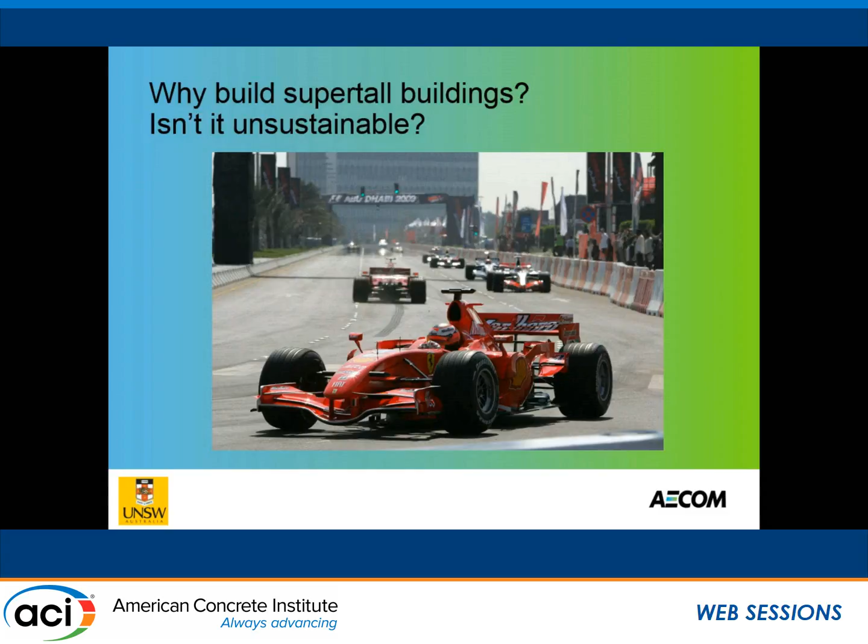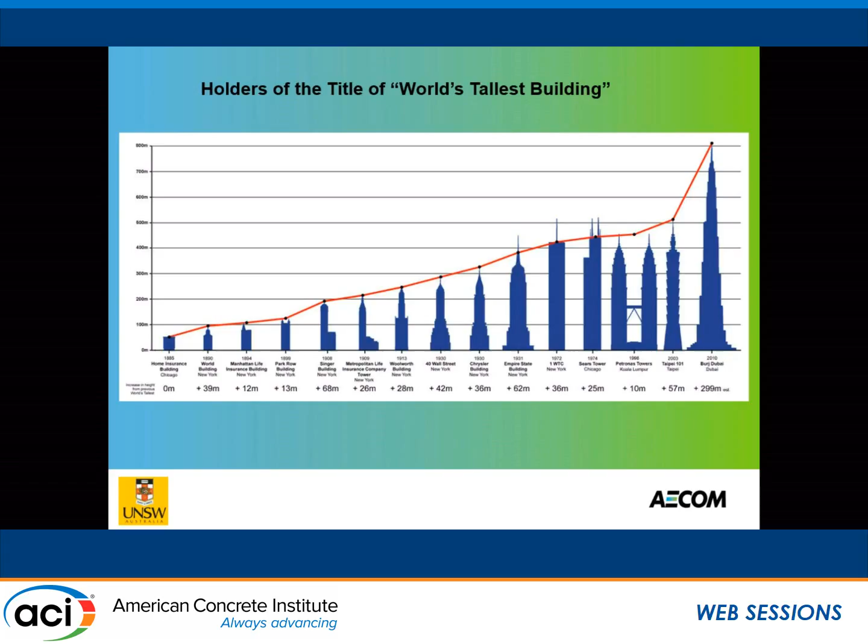This is from the Council on Tall Buildings and Urban Habitat website, and you can see that there actually was quite an inflection between Taipei 101 and the Burj Khalifa. It really was ramped up, and the next tallest tower at 1 kilometre high in Saudi will also be another great leap forward.

Very interesting part of that is that 30 or 40 years ago, if anyone had asked what would be the tallest building in the world, they would have said an office block, and it would have been steel, and it would have been in North America. And now, for the last 15 years or so, they've been wrong on all counts. We have had multi-use buildings, we've had concrete structures, and they've been in Asia and the Middle East.

The piling, which was essentially 50-metre piles, 1.5 metre diameter, were with self-consolidating concrete, and these were in quite aggressive conditions of the order of 2 to 3 times seawater. The raft, which is essentially a 4-metre thick raft covering quite a large footprint, was self-consolidating concrete. That's impressive in itself because it's also holding some serious loads.

The tower is of different grades of concrete. The original anticipated procedure was to use 80 MPa concrete up to effectively 2/3 of the concrete distance and height, then 60 MPa concrete beyond that.

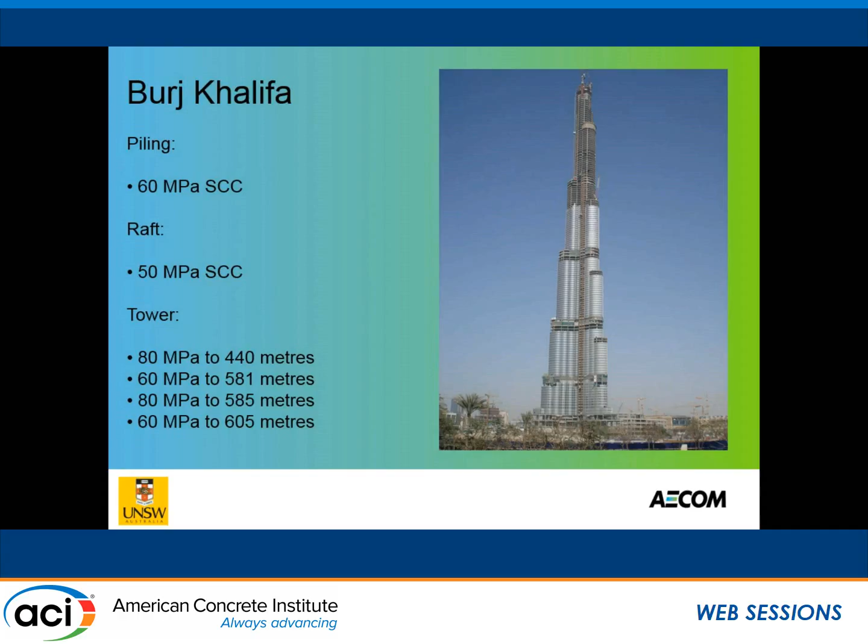What ended up happening, however, was a sort of rethink. As often happens in projects, people become a little bit more conservative at the pointy end, and they wanted to beef up the anchorages for the steel structure on top, which itself is 200 metres high. As one of the engineers described it, it was like building the Eiffel Tower on a tennis court. That's on the steel side of it.

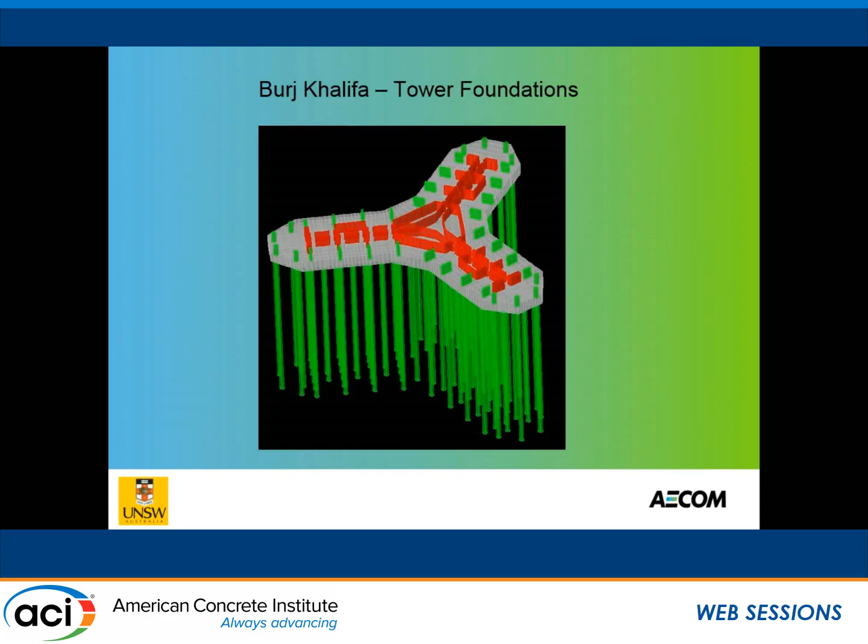We're at concrete, we're in a concrete institute. So that's just an idea of the piled raft that existed here.

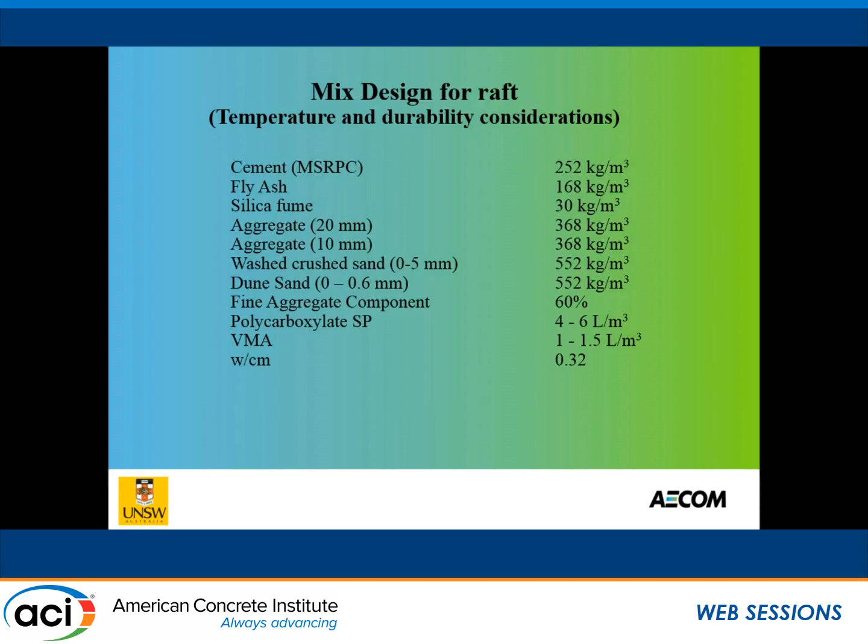Just looking at the raft mix design, one of the dominant factors in the design of the concrete for the raft was SOM's requirement for 160 Fahrenheit, or 71 degree, peak temperature. The original proposals had lower fly ash contents, and I proposed it should get up to the order of 40%, which it did, and it achieved all of its required properties.

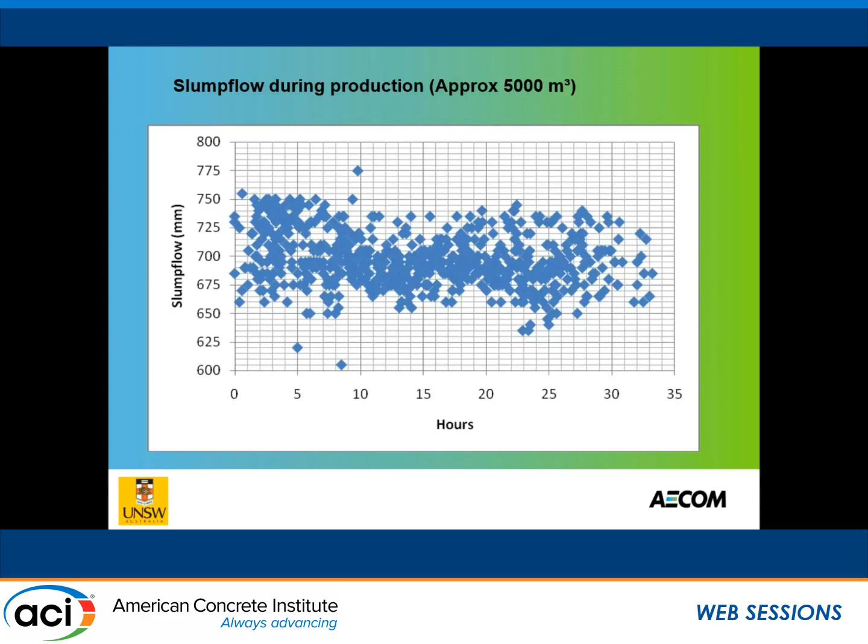This is for the central portion, so this was about 5,000 cubic metres, or 6,500 cubic yards, of concrete poured as a continuous pour, primarily done through the night. These were the slump flow values - basically every single truck was slump flowed, and while some people might whinge about some of these numbers, I'd say that when you're getting basically 700 plus minus 50, you're doing pretty well on quality control.

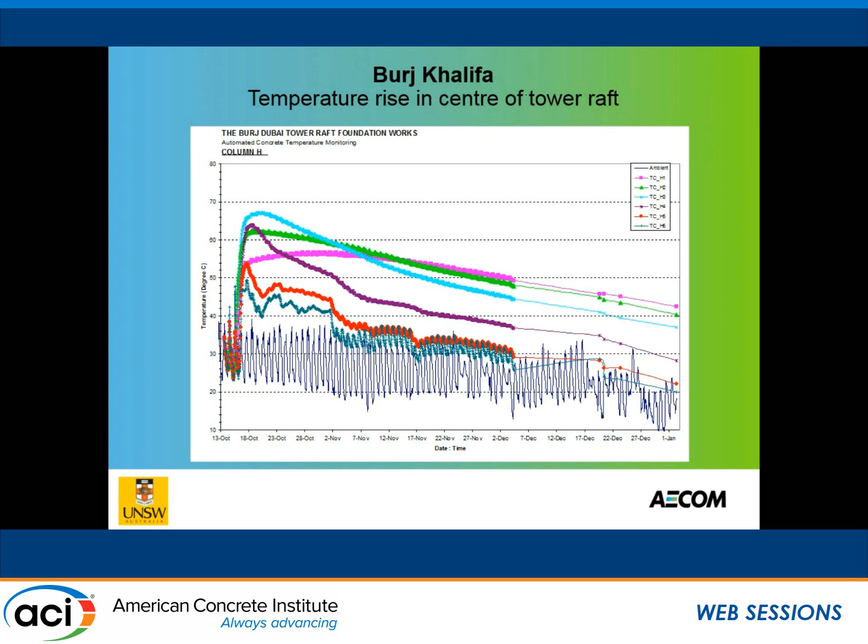But I think for people who've thought about this problem, some few days on after casting this concrete, that concrete is able to deal with that temperature differential without a problem. So I don't think that's a necessary requirement.

But there were some concerns regarding the potential performance of an SCC under these kinds of sustained loads. So people took some cores out of these things - it's quite an operation taking these 10, 12-foot cores out of elements, but they are quite useful and quite encouraging.

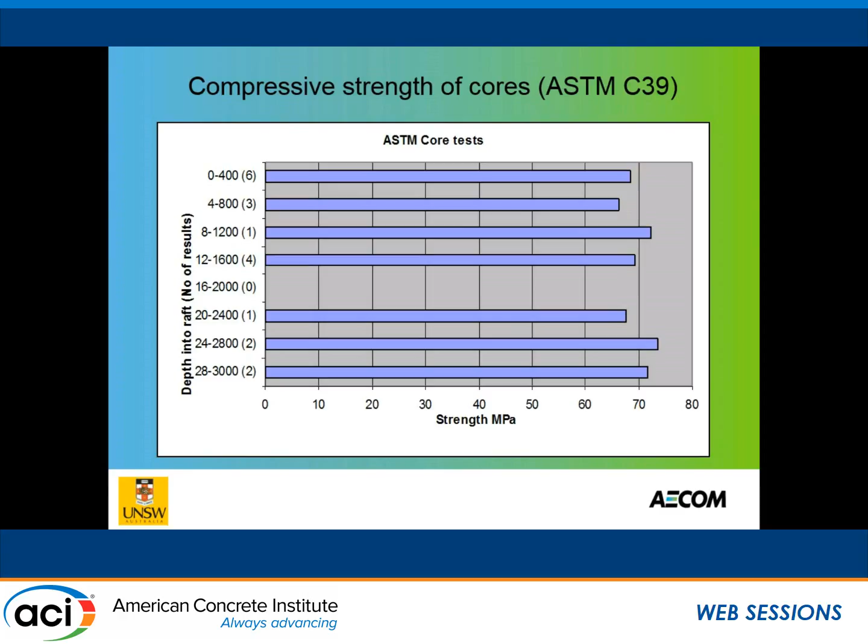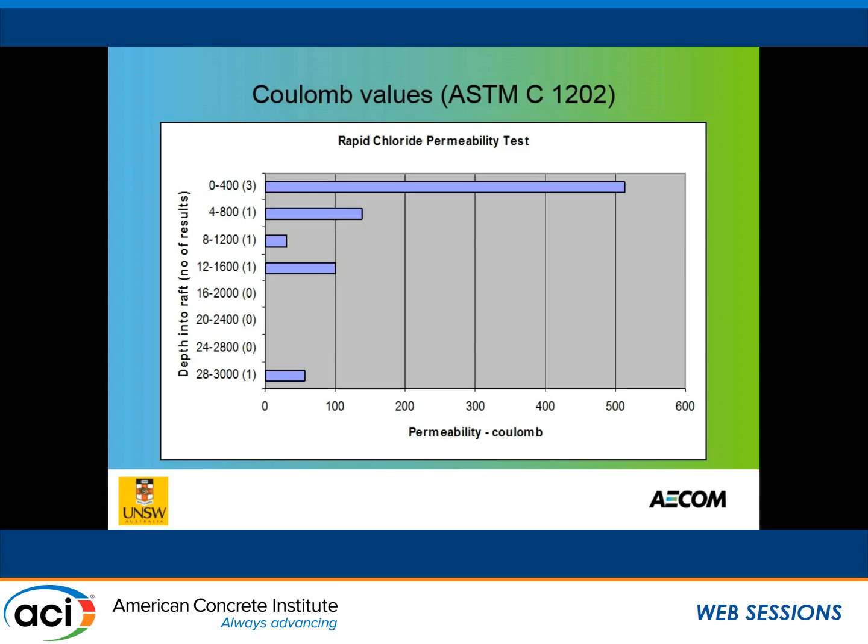The fact is, for what was a 50 MPa concrete, they're getting essentially 70 MPa through the entire section. Modulus was a little bit lower at the top surface, and this Coulomb value was a little bit higher, but if you look at the x-axis, it's not all that high, actually. Just got better at the bottom, not worse at the top.

Then looking at the more exciting part of the project, when it starts to get out of the ground, a number of different mixes were being considered for different parts, horizontal as well as vertical elements.

The initial proposal for this project was to use a 10 mil aggregate, and they anticipated staged pumping up at about 400 or 500 metres on the building anyway. I actually looked at the grading curves for the different aggregates, and the 10 mil stone really didn't look like more than a relatively coarse fine aggregate. And I said, well, I don't think anyone's going to be happy building the world's tallest building out of mortar.

But the 14 mil stone was pretty good, because that was actually a purpose-made aggregate - very good grading curves and so on, which was very helpful. As you can see, all of these mixes, particularly the 80 MPa mixes, are down at pretty low water cementitious ratios, with more modest fly ash contents and decent silica fume contents for the cohesion.

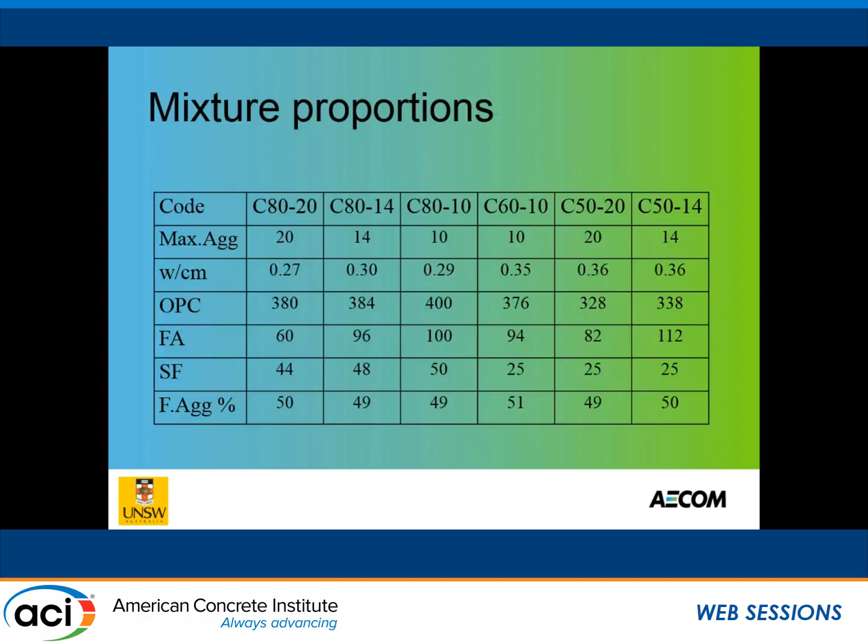Not many job sites have this setting next door to them to be able to do a horizontal pumping trial for 600 metre long pipes, but this one did, because it was basically the demobilising of an army camp near town.

If you can, pumping trials are fantastic, because you can really push the envelope and relatively non-destructively block the pump. One of the things that happened here was I'd told the premix company not to use naphthalene-based admixtures for horizontals and polycarboxylates for verticals, because there'll be times you'll mix these two concretes and turn it to jelly in the pump, blocking everything up. They said don't worry about it. So this was a good way to prove I was right, and they blocked up the pump, wasting everyone's time for about half an hour.

But it's very problematic doing those kinds of blockages on site. What I'd recommend on a normal site without this kind of space is that the good thing about pumping is it's easy to start off with, so you actually have time to get things better and make modifications. If you put pressure transducers in at your pump and at the end of your horizontal, or some way up your building, you can get your friction factor and calculate your performance over time.

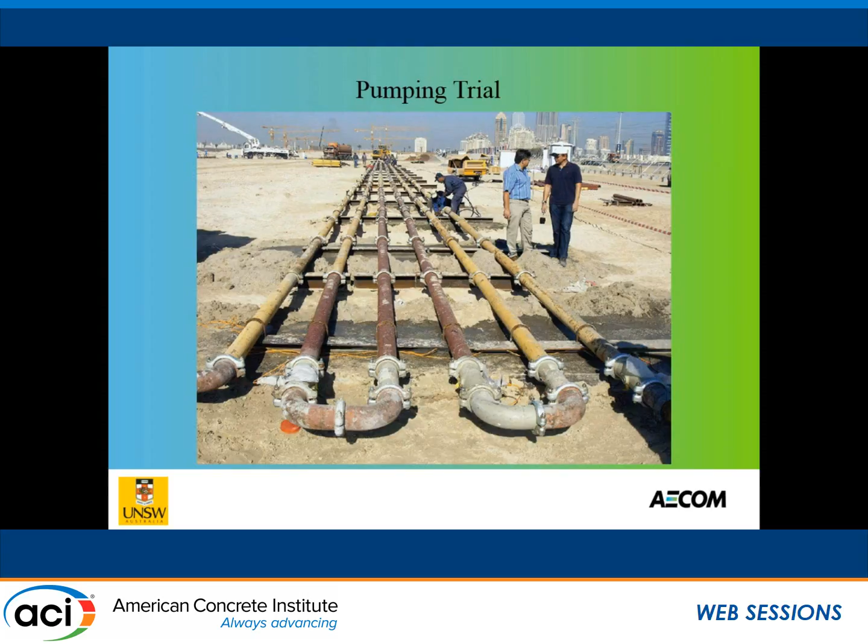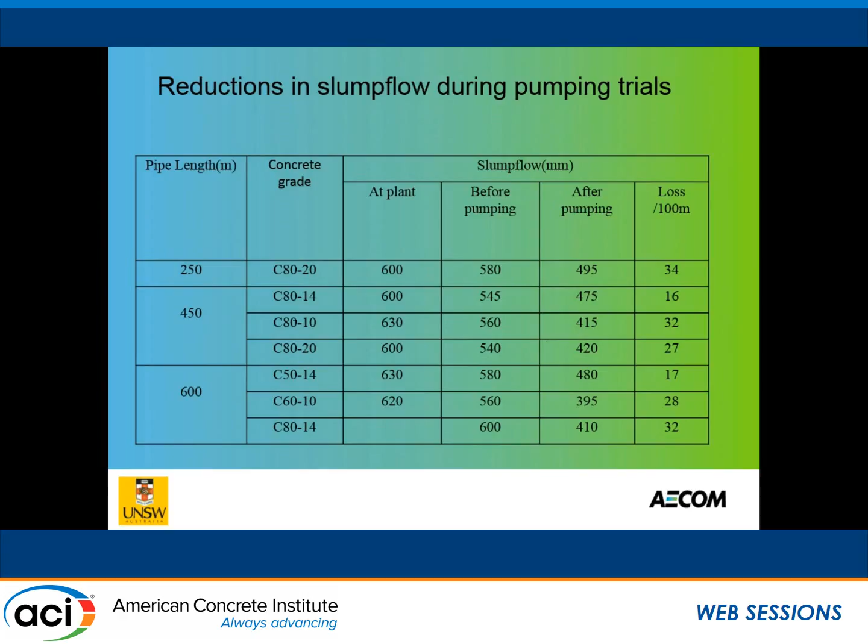So this is the outcome of those kinds of tests, looking essentially at the slump flow reductions. Obviously Dubai is a relatively hot part of the world, so changes in slump flow were of interest. Unfortunately, at this particular stage, we weren't doing rheological measurements.

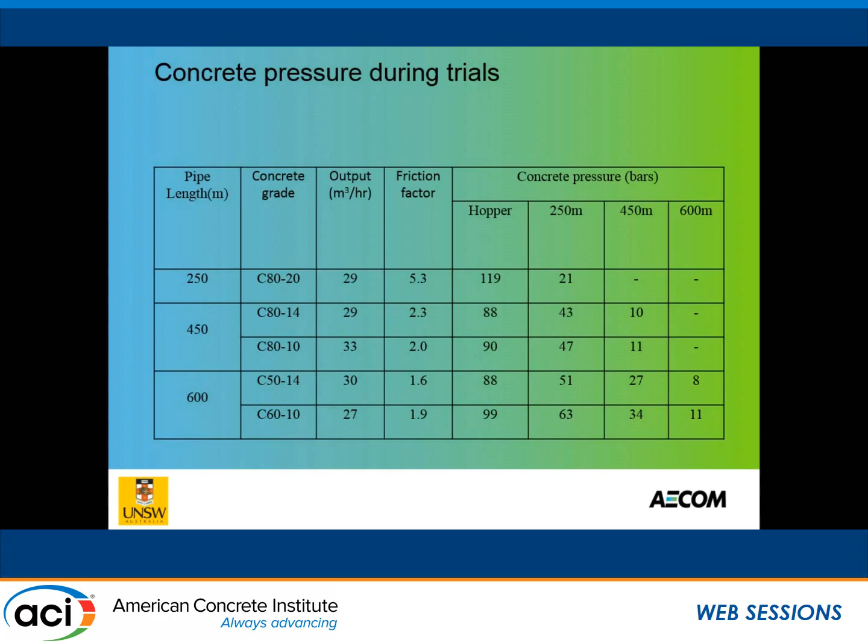The key parameter required is this friction factor, because pumping super tall buildings, essentially we've got a heavy liquid, so that's just hydrostatic pressure, plus you've got to add in the friction factor. So friction factor is critical, as well as the cohesion of the system. Dropping from a 20 mil stone to a 14 mil stone drops the friction factor to less than half. There's not that much change when you go to a 10 mil stone, proving there is a criticality in the kinds of aggregate sizes relative to the pipe.

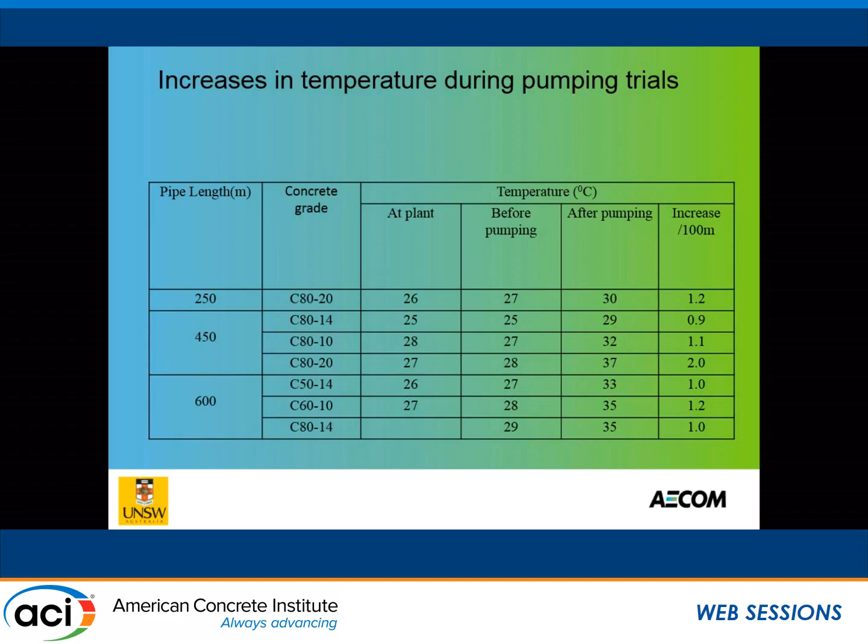These were some other important effects, because, as we'll see later, one thing you've got to keep in mind when pumping long distances is there's actually quite a lot of friction in the system. For this particular job, virtually every cubic metre of concrete cast in a vertical element was cast at night, and it would have contained reasonable amounts of ice to maintain these temperatures. So the heating up was an interesting part of the equation.

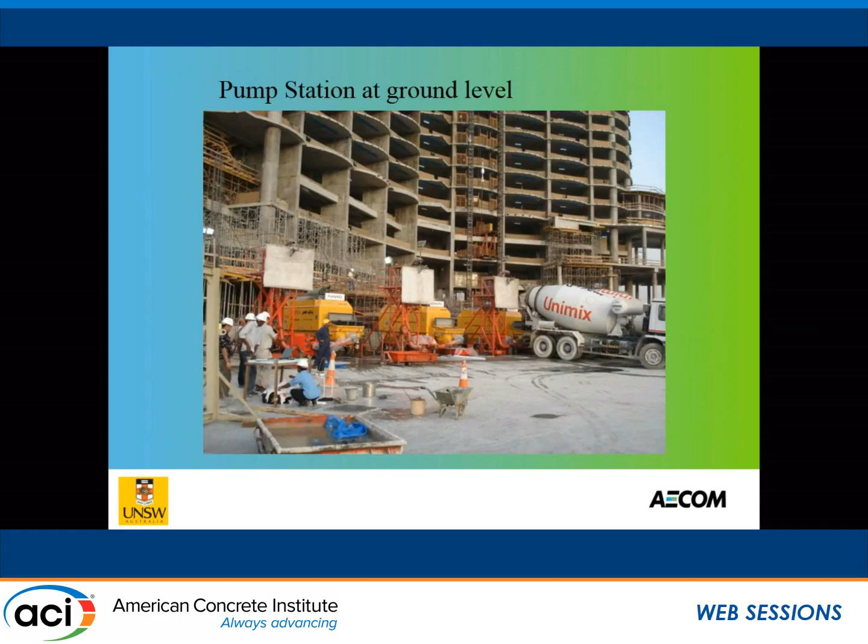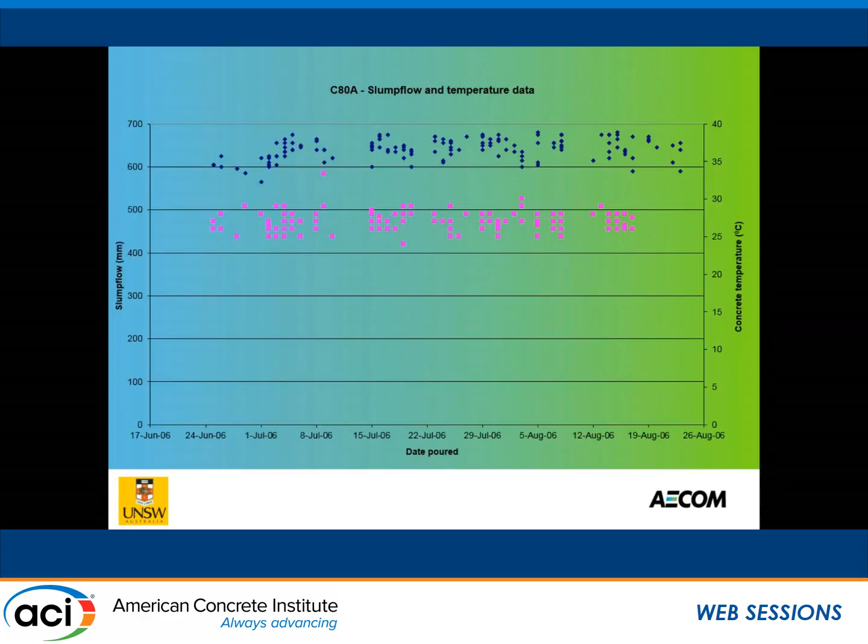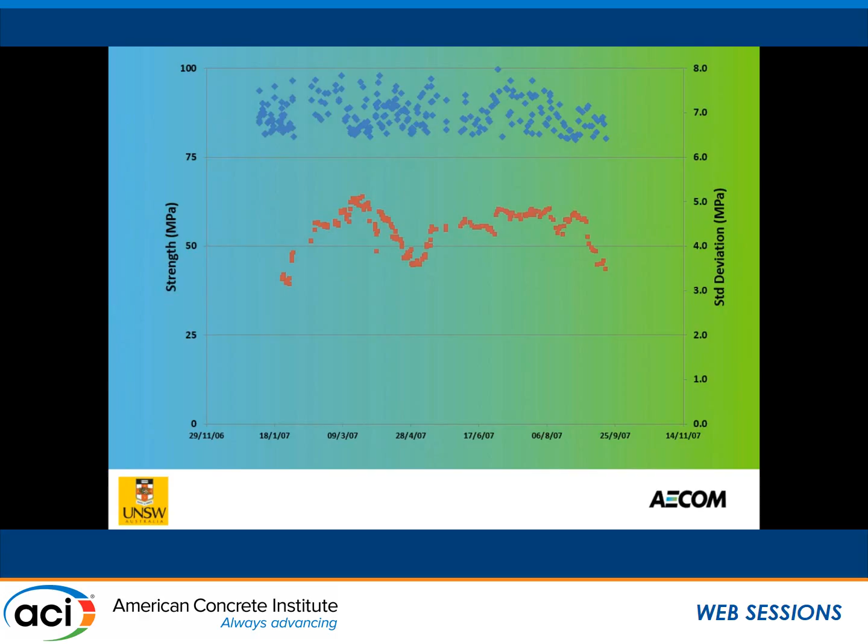This is a pump station at the base of the project, and here's some rheological measurements going on at the side. The good thing, even during production for the tower, the slump flows were pretty consistent, and temperatures were also pretty consistent. Another very important point is the standard deviations of the underlying concrete were not bad—ranging between 3.5 to 4.5, something like that, for 100 MPa concrete is not bad quality control. The reason it's important is that the things that change strength are also going to be changing rheology and other important things.

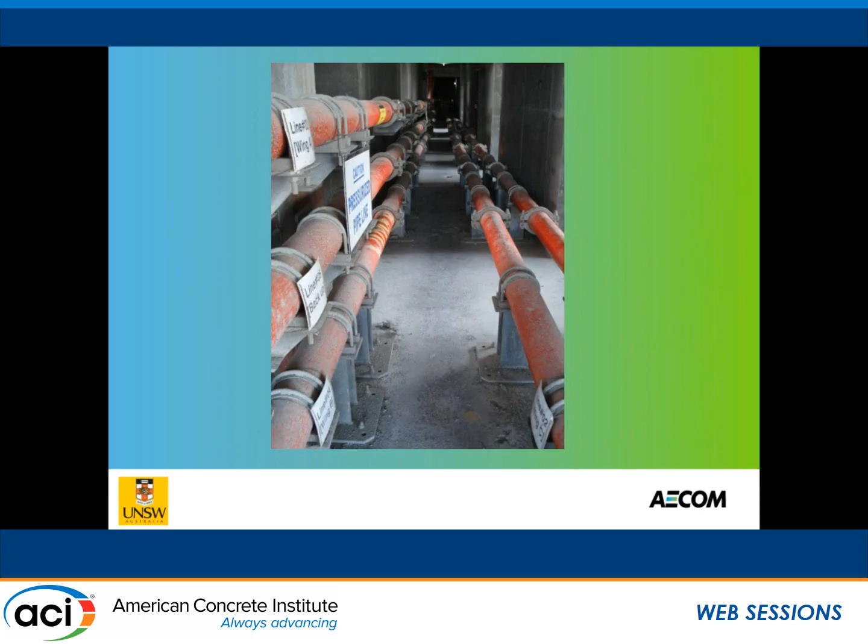The advantage, and the reason people are changing over to pumping for super tall buildings, is you can't pump steel. It can be windy, the crane has to be taking lots of stuff up. You can be pumping concrete to three different locations on the same site, your crane can be moving what it needs to move, and you can be pumping concrete even in windy conditions.

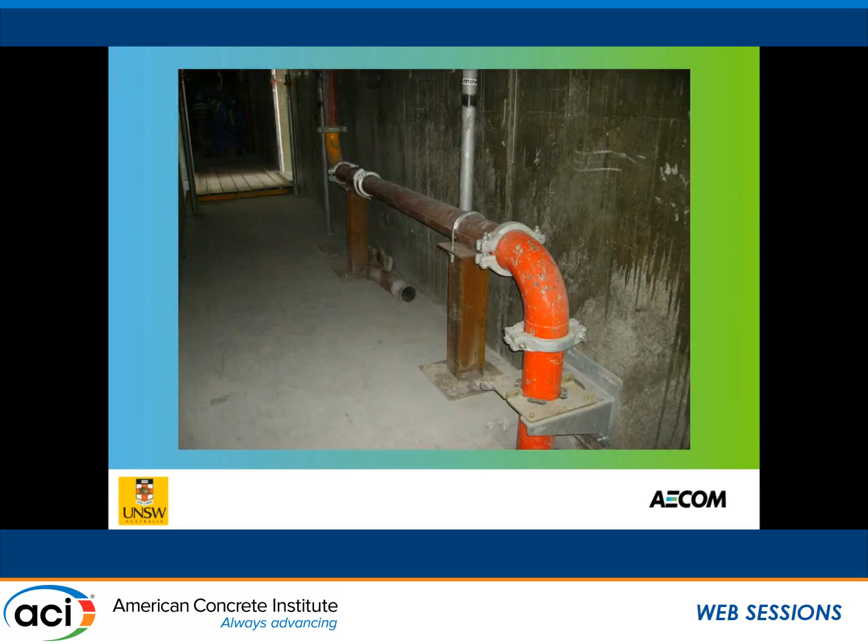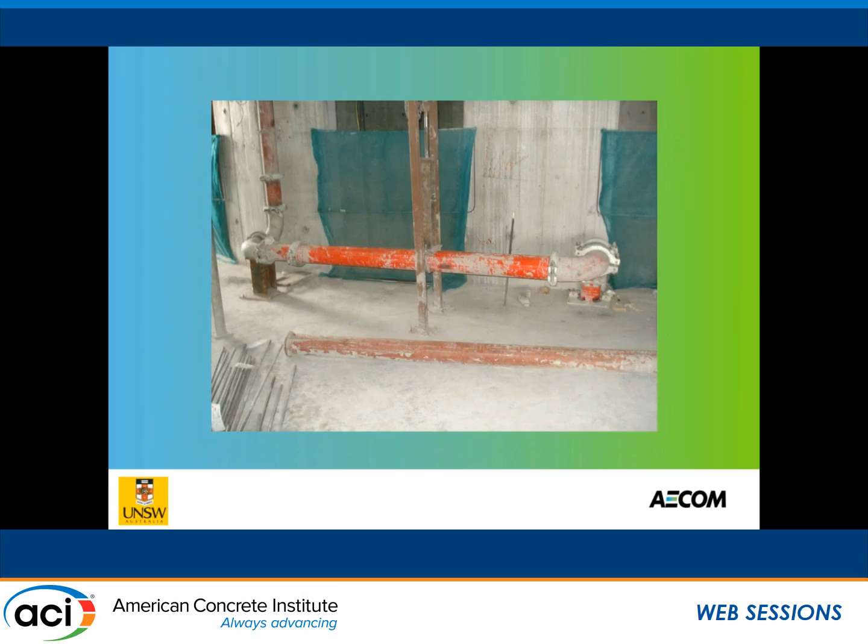There are other considerations though, because you've got stiff stuff coming up and then going into what's essentially a relatively flexible climb form. That thrust as you're pumping can lead to anything up to an inch of movement or more, and wherever you go through these reducers and the rest of it, you can easily end up with bits of equipment shearing off because it hasn't been allowed to articulate. So some simple detailing is very important to allow articulation at hard and soft points.

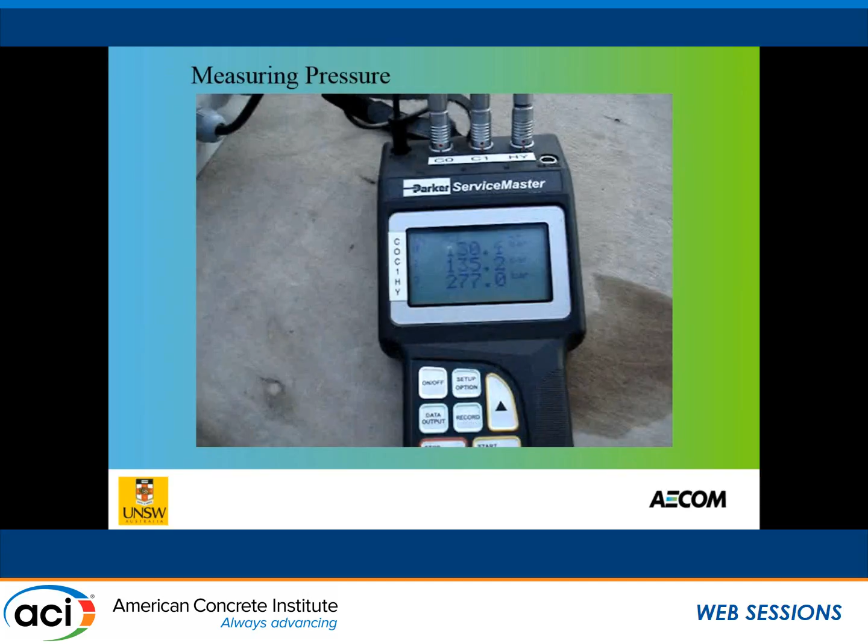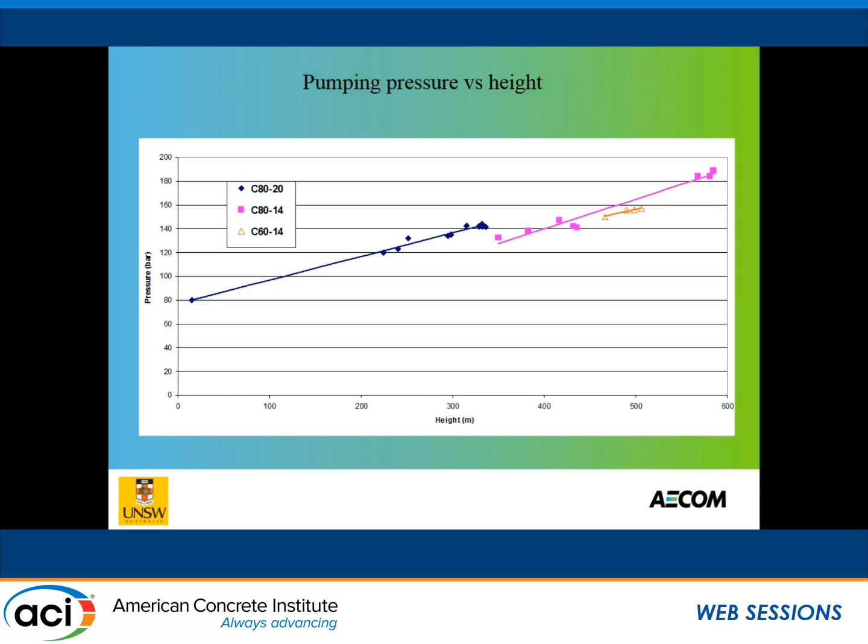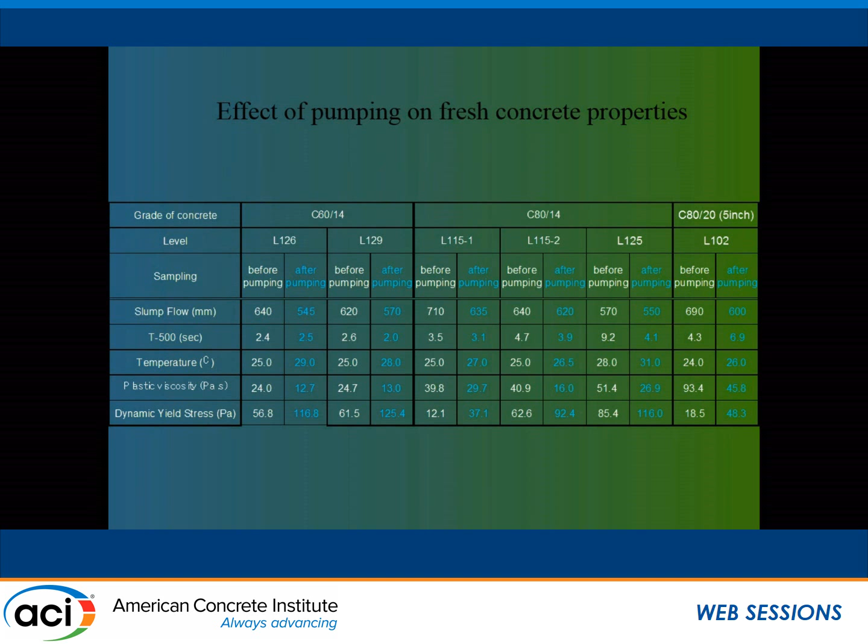Monitoring the pressures as you go along is also very important and valuable, because it tells you, based on how big the pump capacity is, exactly how high you're about to be able to go. One interesting thing from the rheological measurements before and after pumping was that while there was a modest reduction in slump flow, there were interesting effects of a reduction in plastic viscosity and an increase in dynamic yield stress. The reduction in viscosity, since these happened in relatively short time frames, I think is primarily due to the heating up of the system before any other hydration process changes kick in and start making the system a little stiffer.

And just some words of warning.

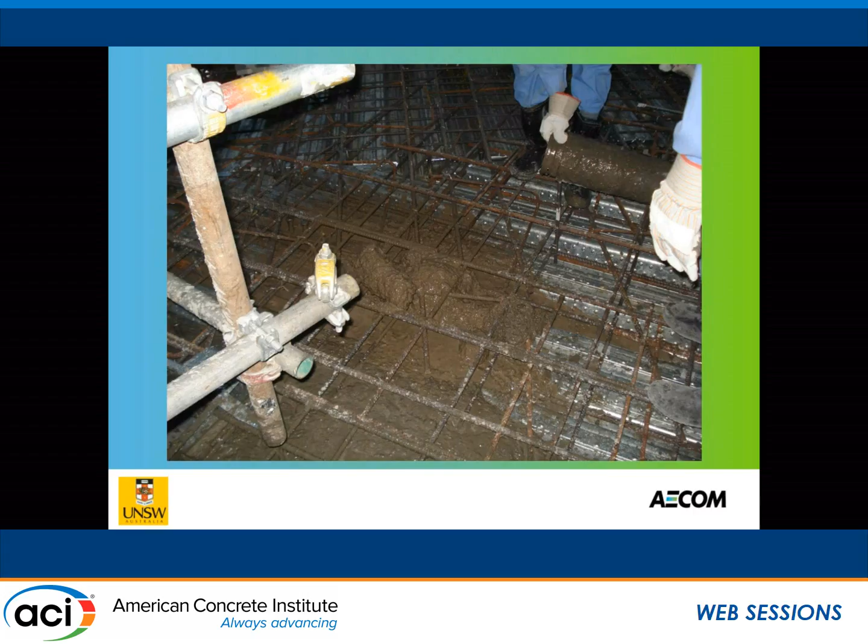This was the final pouring at 605 metres. What ended up blocking it was that the contractor kept using the pump beyond what he was intending, because it was actually cheaper for him to continue, even though there was something like 13 cubic yards of concrete in the pipeline. What killed this concrete, and what kills most pumping operations, was a lousy slurry. You put wet slurry into a pump, particularly with self-consolidating concrete or high workability concrete behind it, and you will destabilize the front portion, end up with segregation, and start blocking up the pump. That's what happened here.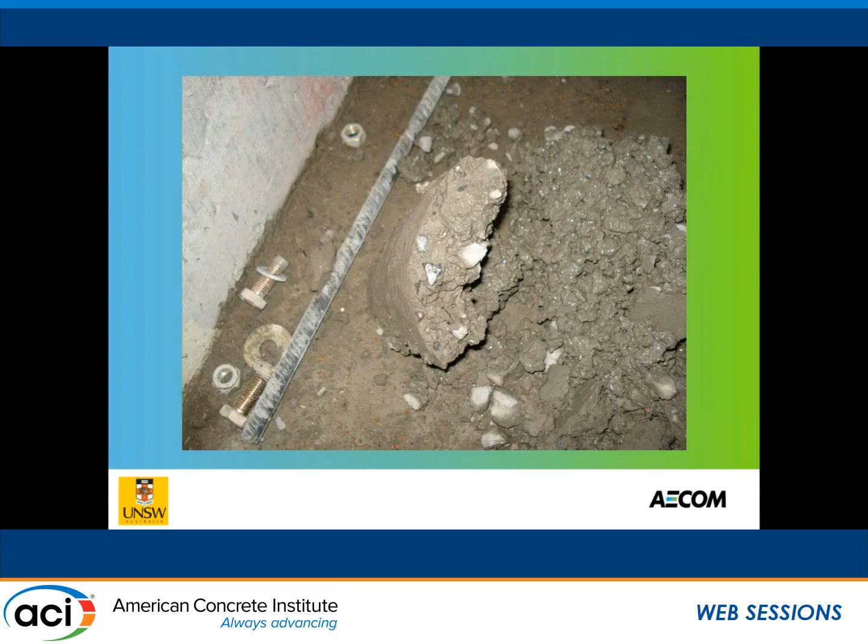The other thing this points out quite interestingly is this thermal effect: if you have delays, the outer section of the concrete, because of this friction factor, tends to stiffen up compared to the interior of the pipeline. This is going to be the next big thing someone can talk about in a few years' time. I understand they're already up 100 metres, so they're going for a kilometre high.

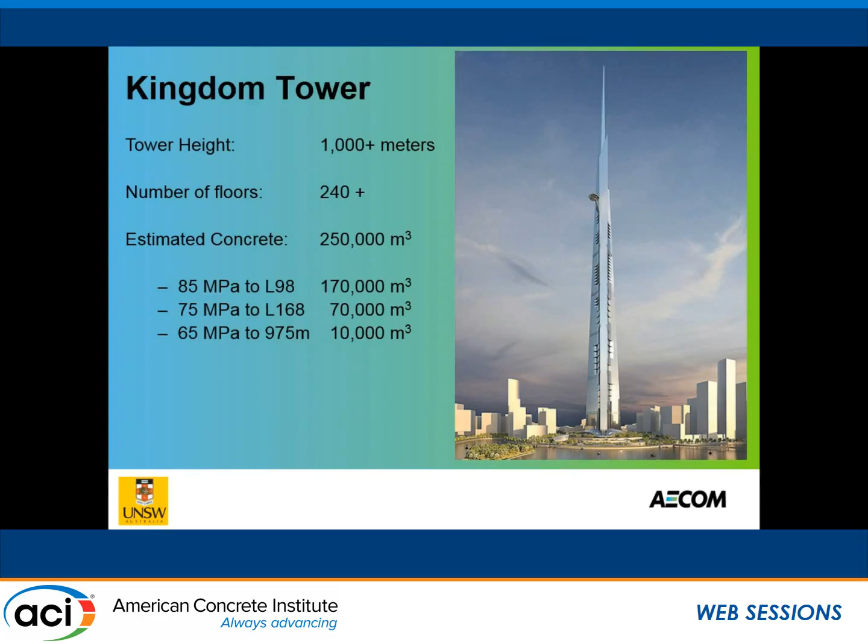I've been on that job site a couple of times and got a chance to see the concrete as it's being cast, and it was on the verge of segregation after pumping because of a reduction of viscosity. Could you elaborate on when you went from one aggregate size to the other, the viscosity or friction factor dropped by half? What are the reasons behind that?

It's more interlocking activity. At 20 millimetres, the aggregate is interacting with the pipeline, and you're having boundary conditions, potential minor bridging problems and so on. As soon as you drop down... those original trials were done in a 5-inch pipeline, even though the construction was done in a 6-inch pipeline. So that's the key. In fact, I think you'd be quite well served under many circumstances to not go to a lower maximum aggregate size, because it's quite troublesome to do. A lot of people automatically with SCC just go straight to a very small maximum aggregate size, but I don't think that's necessary, and I think that's just lazy design.

So the shear walls you were placing were not that highly congested? Oh no, it wasn't. No, it was more to do with pumping than anything to do with the construction site, and that's the reason for making a compromise on aggregate size purely on the basis of pumpability.